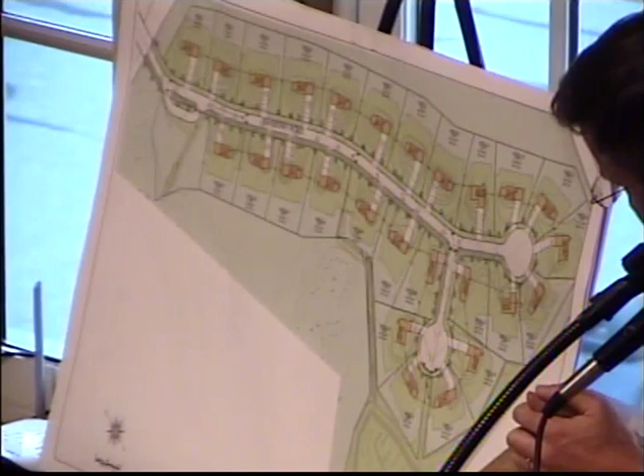The one thing I did mention, and I think I put it in an email, because at the last meeting I was at a wedding in New York, so I sent an email to the board members just saying my thoughts on going forward.

Minimum 20-foot spacing from property lines, and also top grade no more than 60 inches higher than the road. Now this isn't anything spelled out, that's etched in concrete.

I think the further distance from the property line is gonna be more beneficial. We were talking at the meeting I was at that maybe we do it where the water table is, and like I mentioned in my email, Bob regulates 2 feet above the water table. But I'm just not sure that going by the water table would be the right thing.

So I'm looking for some assistance on this. I don't want to put something in the regs that isn't going to work, because we're in the process of redoing our regs. I think we've done that in the past, so hopefully we don't do it again in the future.

So is 60 inches the grading around these houses? What do you have? I see you have grade lines, but I don't see any numbers. Yeah, there's a few numbers on there, a couple. Each line is 1 foot in elevation.

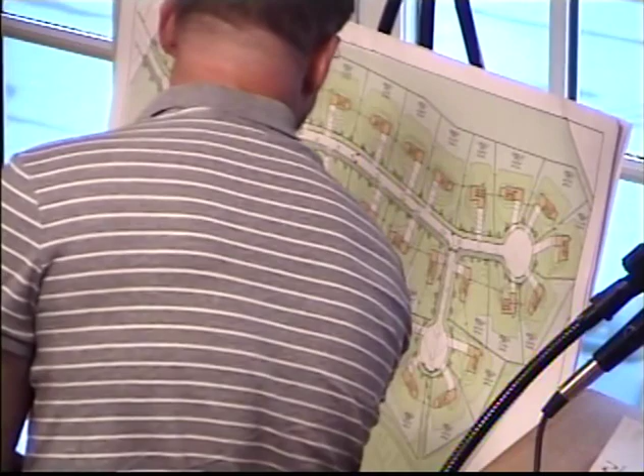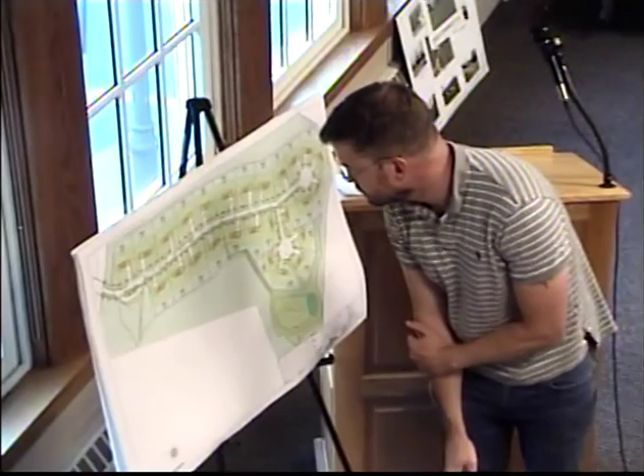Because the top of foundation is, say, 105. So that's a 7-foot difference from top of foundation to the road. And I'm sure you're going to have a couple feet of foundation showing, so it's 5 feet of grading. So 7 feet above the road, but it looks like your existing grade is at 98, so I'm not sure how that one falls into what you were just explaining about being on a hill.

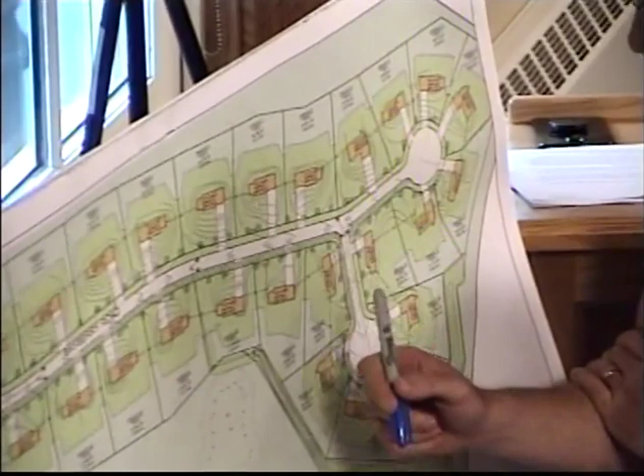Did you see parcel 7? Thinking the label might be incorrect, but the grading shows the garage at about 102. And then the top of the foundation would be 3 feet higher than that, so about 105. Yep, okay. So that's quite a ways up.

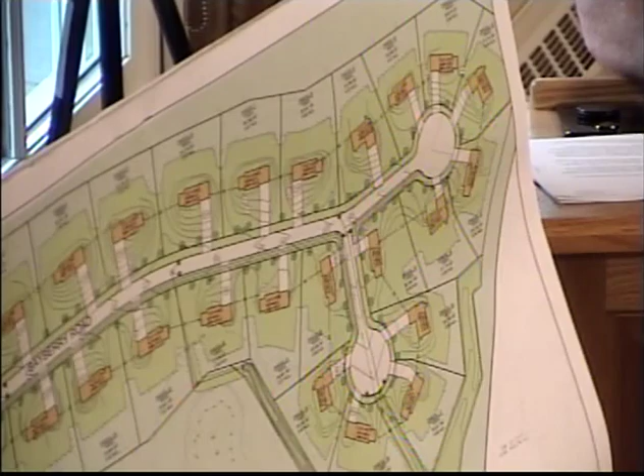I'll show this thing, most of them. So again, that's my concern. Am I seeing that? Is that 98? At least that's what it's showing. I don't know if it's... I was gonna point out the same thing, parcel 7 and 6 seem to be that mounding that we were trying to avoid.

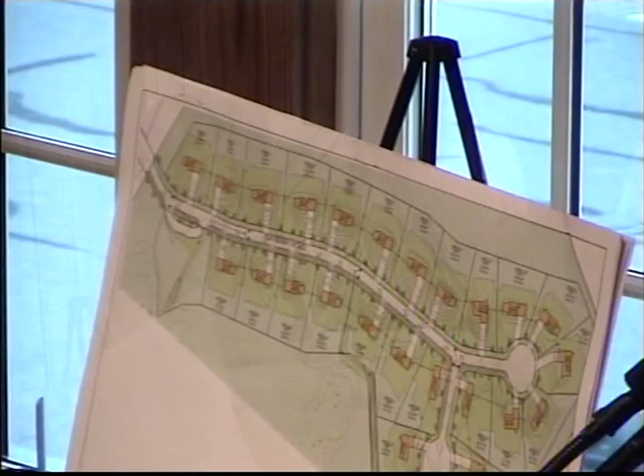Yeah, I mean, we're talking about one thing, but the plan is, so I think we have to get kind of specific on the grading of, in the elevations of... Are you satisfied with the distance between the houses? I thought, I'm satisfied with the way that looks, myself personally. The other guys can speak for themselves, but I think the layout looks good.

The detention area, the basin is something that's gonna be, you're gonna work with Steve to get that fine-tuned, so we make sure it's exactly what we want. So still, my issue, my concern is the grading. So I think that's something that needs to be addressed.

Wonder if it's helpful to put estimated groundwater elevations, for a general idea, so we can start to look at it from that point, which I think then makes it go... it makes sense, exactly with what Bob says. Yeah, then we're going from it.

And again, I don't want to tell you that you can't build on a house lot in a subdivision because the groundwater is 2 feet lower, or 2 feet below the grade, and that doesn't fit within what I'm thinking of, 60 inches higher than the road. Because again, 60 inches, I'm saying 5 feet of material coming in, your foundation, you got at least 2 feet of foundation, so you got 7 feet. So that's quite a bit. And I think when we get over that, I think that's when we start getting these big elevation differences between one yard to the next.

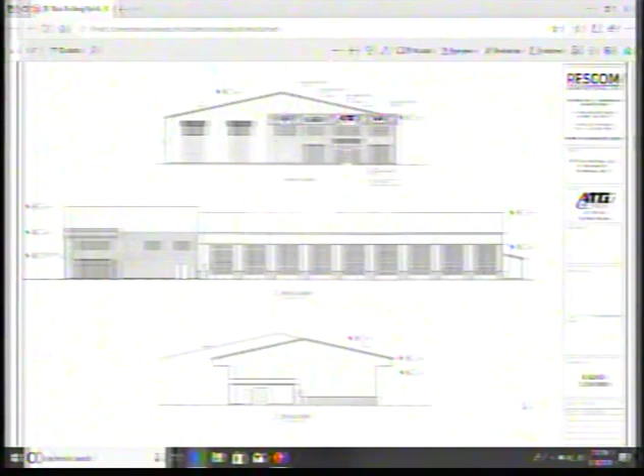There's no storage of trailers on this site. The trailers will not be stored there. Someone comes in with a cab, they're going to have to find alternate storage and just bring their cab to this site for work. So there will be no spare part trucks, used trucks, or junk trucks on the site. They do the work, they use new parts, they don't have any used part vehicles on the site.

So I think the operation fits into the park. In February, I met with the lot owners at their annual meeting and the Board of Trustees. I reviewed these plans with them at that time, and they sent a letter to the board, which should be in the file, saying they had no objection to it. They wanted to weigh in on some landscaping plans, which we said we'd be happy to accommodate. But as far as the use and the proposal, they had no objections. So I think we've addressed the neighbors.

There are many other businesses in there, FedEx and a few others, that have 24/7 truck traffic there, of a much higher volume than we'll have on this site, because our trucks aren't coming in and off the site with cargo. They're not picking up and dropping off. The truck traffic is for maintenance, repair, and warranty work. So unlike some of the other businesses in the park, our volume won't be the same, because we're not bringing goods in and out of the park.

We also propose... The Hill Street and the easement, what's that all about?

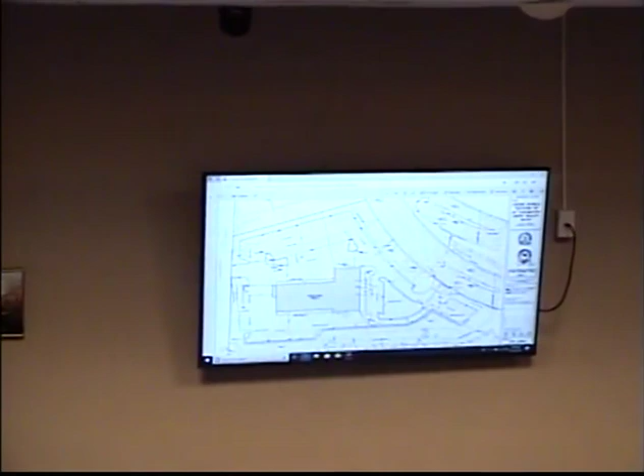What's the Miller Hill Street property used for? My construction company. Okay, so you have the right to drive up and down Hill Street, and you have a deal with the neighbors? Mr. Miller, you'll have to get up and speak to the microphone. Okay, Bob, you do get it.

Probably a couple of years ago, the Millers were working on the highway, taking in grindings. The work was done at night. The truck traffic had to access their site through residential neighborhoods. I fielded a lot of complaints from truck traffic late at night, so I brought it to their attention, and they came up with a solution to cut through the park and make this access way to the back of their property, to eliminate trucks driving through residential neighborhoods and waking people up late at night. So it serves a purpose, solving a problem we had by having this access way.

What's the zoning on Hill Street? Hill Street's residential A. Is there any problem bringing trucks from... well, we're not bringing trucks from Paramount to Hill Street, we're only bringing them from Hill Street to Paramount.

They're in a business zone where they are on Hill Street, so they're cutting across the business part, through Paramount Drive, so they're not accessing any roadway where they'd have to navigate in front of residential. Bert was wondering what their property was zoned for.

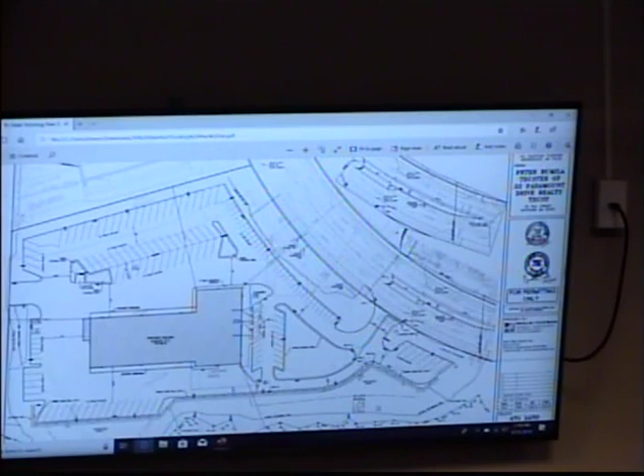How wide is that section from Paramount Drive Road, see that? From the road to the building, it looks... here's a laser, hit the top button, it's a laser. This distance? He's got this distance right here? Is there places for, this looks like, is this grass area? Yeah, I might be able to help you on that. We've had the architect do a rendering initially with the plantings and how they may mature, so I think this is the view from the street that might be of assistance.

Yeah, you guys can look at that one. So this is the grass. Yeah, yeah. So you do show, do you have a landscape plan on there? Maybe, Bob, maybe you can go to the landscape plan if you can find that. Sometimes we get these beautiful renderings, and then when they show up, they say, oh, that was just a picture.

So if that's the picture, it looks beautiful. I'm sure, did you present these pictures to the park owners? They got the whole package, they got the revised package. Oh, these were two different pictures. That was one in July. This is the other one that we didn't see.

All right, well, the pictures look nice, and you have plantings, so there's your planting scheme. You're looking for a waiver for... you look like you have a lot of plantings on the islands. What are you looking for a waiver for? Maybe you can help out with that one?

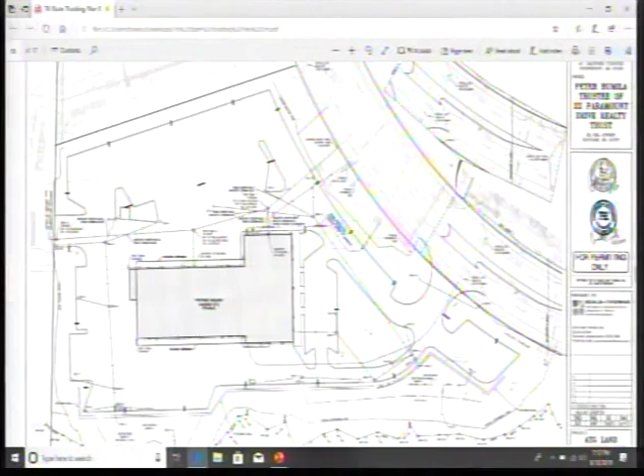You have a line on the first one? Scroll up a little bit. Yeah, we have a map showing the zoning line. Why don't we do it that way? The text is right there at the bottom. It's about 60% of the land area of the building footprint would be in the business district, and about 40% would be in the ED. So if you squared off that rectangle, that's just about the zoning district line, right here. If you went... okay, right there, just like that. It's very, very close to the footprint.

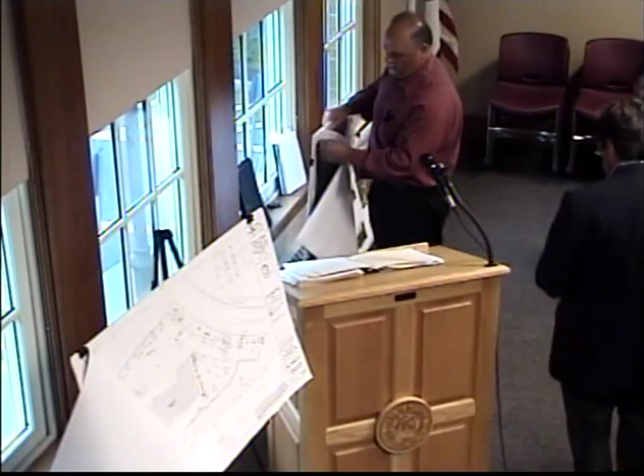And you've talked to Bob that you have to get occupancy permits from, and he's satisfied with what you're doing in each section that meets zoning? Yeah, I've given him a letter addressing all the parts of the bylaw and what's allowed and what isn't allowed, and how we're breaking it up with the footprint of the building. Okay. Yes.

You said some things that you're not going to do? No used trucks? Well, we're not gonna store and have used trucks. We might take a trade-in, it could be there for a couple of days before it goes off somewhere else, but we don't keep 50 used trucks lined up. And no parts vehicles either, and no trailers. All right, so it's not gonna be a surplus yard.

And we do wanna sell new parts. How do we know that this is going to be true? You're going to be out there every morning, Bob, checking on it? I don't think we have to be, because being in the park, they have to make the park happy, I think, before they make the town happy. The people in the park, their board, their committee, really monitors each other.

Well, and you're going to need a license to sell motor vehicles. Correct. We're before Concom now, and as soon as we get this approval, we go to the selectmen next for the vehicle license to sell the trucks. And are you willing to have a restriction that you won't sell any used vehicles?

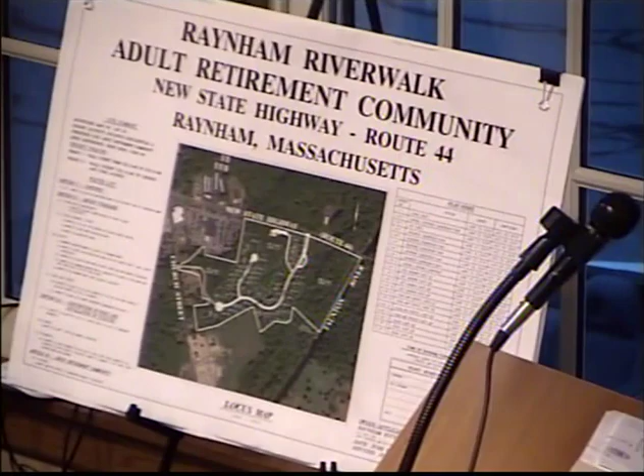Additionally, we received an updated letter from the Town of Raynham Fire Department, the fire chief. He's reviewed the most recent plans and found that the streets and the common driveways within the development provide adequate access for fire, ambulance, and emergency vehicles. I have a copy of that letter for the board as well. What's the date on that? This is July 25th.

And as we stated before, we applied for the variance with the ZBA for the buffer zone along the back of the property. The variance was allowed, it was never appealed. I don't know if the board has a copy of that decision, but I have a copy for them as well.

So at this point, I'll turn it over to Mr. Giosa. He can address any questions you have with anything on the plan. But I think we're at the point where we're ready to hear your opinion on a vote tonight. Okay, well, I want to turn it over to Mr. Churchill. Do you want me to go up to the stand? Yes, please, identify yourself.

My name is Brian Wallace with JC Engineering. As the attorney stated, we released our final review letter stating that we had no further recommendations or comments based on the July 29th plan set. But if there's any questions specific to the board, I'd be happy to answer that.

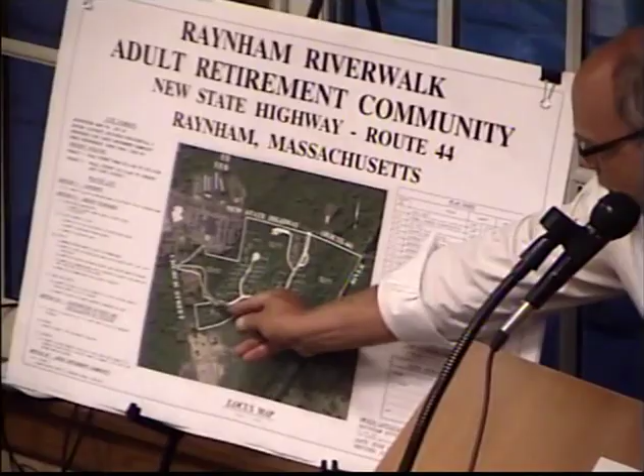Okay, so from the beginning, the original plan had 49 proposed lots, a very similar configuration with one exception. The major change had to do with the primary road of the project, the road that originates... That thing's not engineered very well, is it?

No, I'll tell you what I'm gonna do. I'm gonna take the easel that I left here on Wednesday last week and set that up. It's a little more stable. Here, Russ, check that connection for me.

For the record, we don't know where that came from, so. So if you broke it, you don't... I own it, you don't mind. Understood. There, a little more stability.

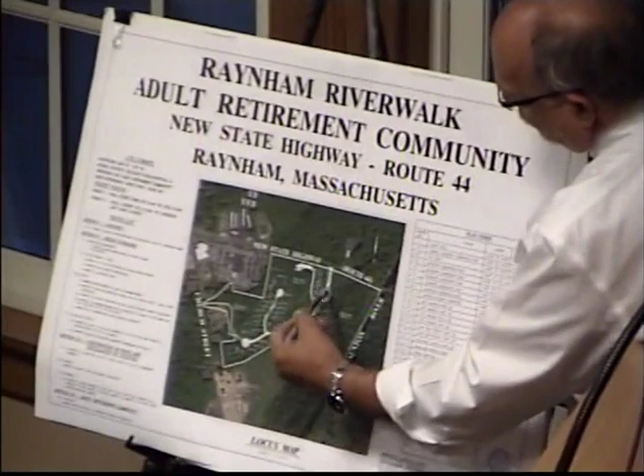So, as I was beginning to explain, the main road coming in from Route 44, we've always had the cul-de-sac here, but we also had a continuation of the roadway out to Church Street, and that was a point of significant debate going back to the very first meeting on the project. After getting input from the board members who expressed significant concerns regarding that point of access...

We came up with a revised plan that eliminated that primary road heading out to Church Street and replaced it with a gravel emergency access way. That eliminated the day-to-day traffic that some residents and board members expressed concern with going back out to Church Street, and basically focused the primary traffic back out onto Route 44. To control that, you have a bigger version of that other than the, what do you call that?

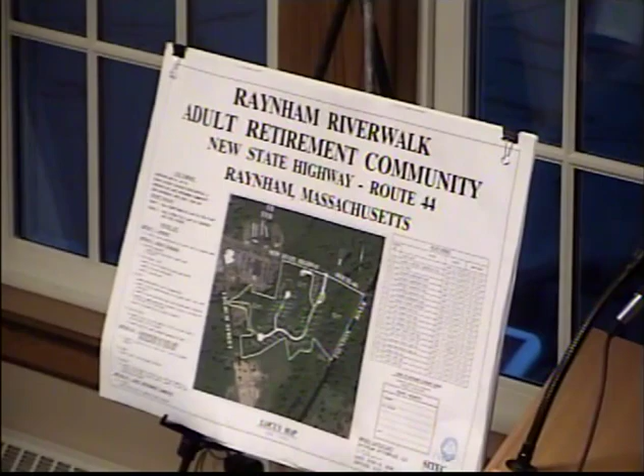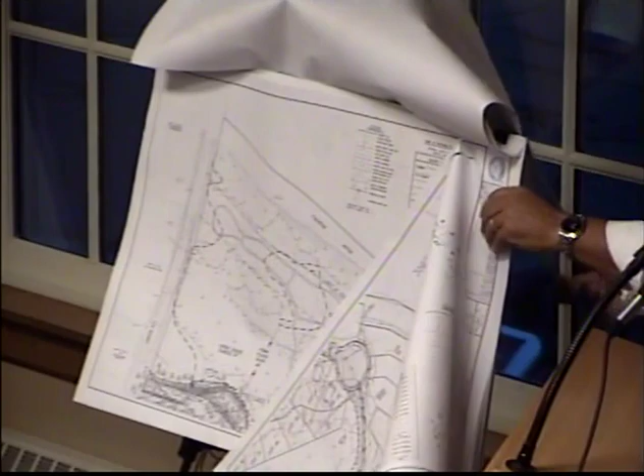Actually, we can go right to that section since we're speaking directly about that area right now. Plans in this set. Okay, so this is that termination point, Church Street, and this is the emergency access we were just referring to.

That has now been designed with breakaway bollards on either end. We've got a paved apron at the Church Street end and an apron at the cul-de-sac side, breakaway bollards and signage depicting that as an emergency access point. That's probably the one significant change that has been made since the original plans came forward.

We're running utility lines through that area, which is allowed activity in those locations. We're bringing the water line in from Church Street, and we are looping some electric service and communication lines also from Church Street.

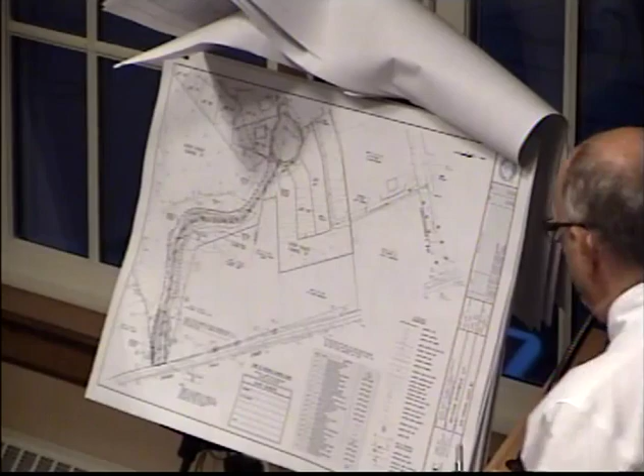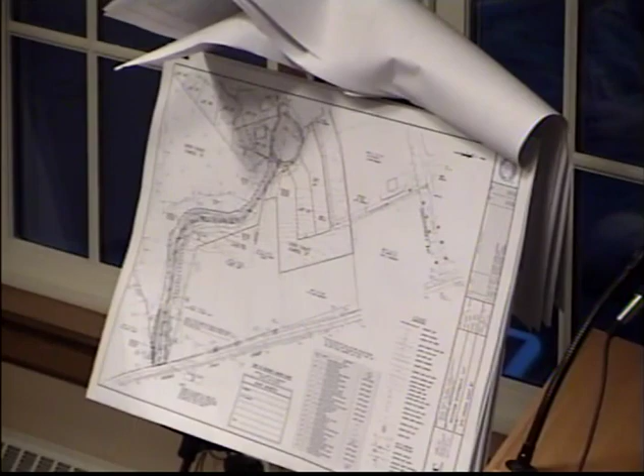The other significant change we made is in the same area. If you recall, on the first couple of versions of the plan, right in that area we had proposed RV and boat storage. It was determined that was not an allowed by-right location for that activity. We went before the zoning board and then withdrew that particular element from our petition with zoning. So we've eliminated that as well from that location. Those are probably the biggest changes overall to the plan.

But if we go back to the very first plan, you'll remember we had much narrower pavement widths. Board members expressed concern about the size of the development and the pavement width, so we opened up the pavement to a wider cross-section. We think that's an improvement to public safety and overall access within the development.

We also changed some of our drainage associated with that, because we originally started with a porous pavement design, as the board may recall. The porous pavement, there were a lot of concerns raised because it really hadn't been proven in this area. There was some reluctance regarding that option for long-term maintenance and stability within the road system, so we did back away from the porous pavement and went to a more conventional approach.

We did a number of Stormceptor water quality treatment units now, and we think that addresses that primary concern at this time. I think the porous pavement has a place somewhere in the future, but obviously not for this particular project.

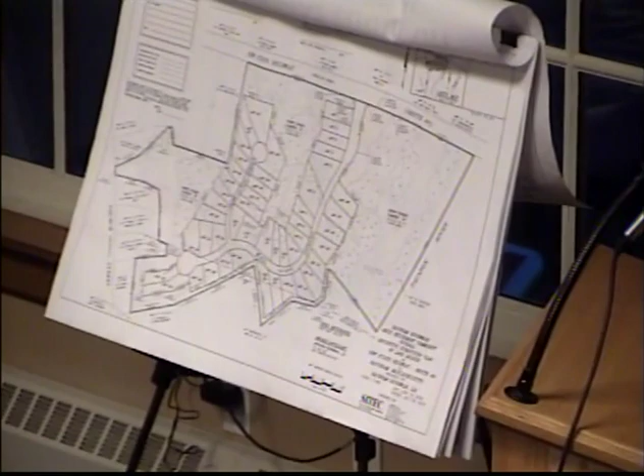So we redesigned our drainage, and that obviously changed our drainage analysis. We had to add some additional flow mitigation as well as water quality mitigation, and also had to demonstrate that we were meeting the recharge requirements in an alternate method. We've been able to do that to the satisfaction of your consultant. In doing that, it added a number of drainage easements to the plan that didn't exist on the earlier versions, and those have been added. Those were some of the final comments that came in from the consultant on the plan.

So those are probably the major shifts in the design from day one to now. We have also reduced the number of lots. Again, we started out with 49. When you look at the plan, you'll see the lots are numbered up to 48.

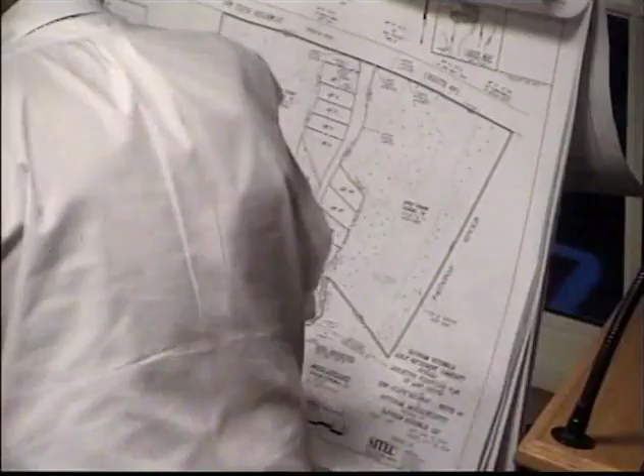So that's one off the plan, but also because the zoning change didn't occur last year or earlier this year, and we didn't get zoning relief to allow residential use in this area, those 4 lots, although they're depicted on the plan, are designated on the recordable drawings as not being buildable lots. So the net result is we started with 49 lots, we're down to 48 depicted on the plan, but out of the 48, only 44 are buildable lots.

So it's a net reduction since day one of 5 lots within the project, and those lots are now shown on the grading plans as just being open space, in terms of we're not clearing trees on those lots. They're just going to be created on paper but not designated as a buildable lot. We would not be able to obtain building permits for those lots because they would not comply with the zoning to build a structure on those properties. So they are specifically noted as non-buildable lots on the recordable plans. And I guess that's probably the last of the major changes that have occurred.

Okay, and Mr. Gallagher has worked with you on this. From the last time you saw a plan to now, you say there's some minor changes? What are the last few changes you made?

The last few changes, and we've outlined these in a July 29th letter, the July 29th revisions: we added drainage easements to lots 1, 5, and 20. That was the result of some changes we made to the drainage design, and it was basically an oversight in not creating designated easements on those lots, so we've added that to the plan set.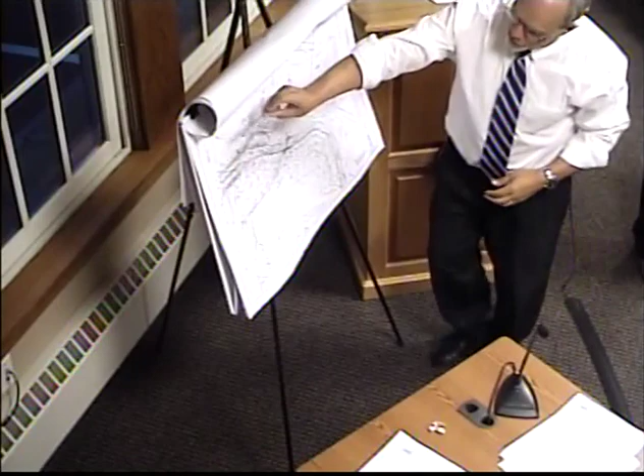Okay, give me a point of reference. Church Street is on the left? Nope, Route 44 is on the left, okay. This is the main entrance coming in. This is the community building down in this area, near Route 44. These spaces right here are designated for boat and RV storage in this area.

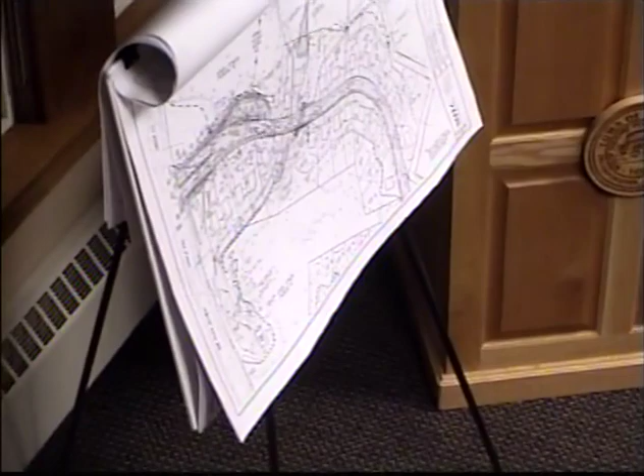And we're providing for it, the regulations don't have a set number. What'll end up happening is as units are sold within this development, those spaces will be issued on a first-come, first-served basis. When they're sold, that'll be the last available one, and future residents will not have RVs or boat storage within the development. So because we're controlling the sales, there'll be a mechanism to make sure that's adequate, and we'll make sure the project stays in compliance with the regulations of not storing on the individual lots.

Okay, I have two other things that keep nagging at me in terms of the overall plan. One is in relationship to the zoning bylaws, the definition 18.3, a self-contained alternative residential community. I don't see it as self-contained in that these lots, buildable or not buildable, you don't have to repeat that for me because I understand that fully. These lots and this cul-de-sac, unless I've got a plan that doesn't have it, are outside of that business-zoned area. They're in a residential-zoned area, which says the project is not self-contained. It's outside of that. That's number one.

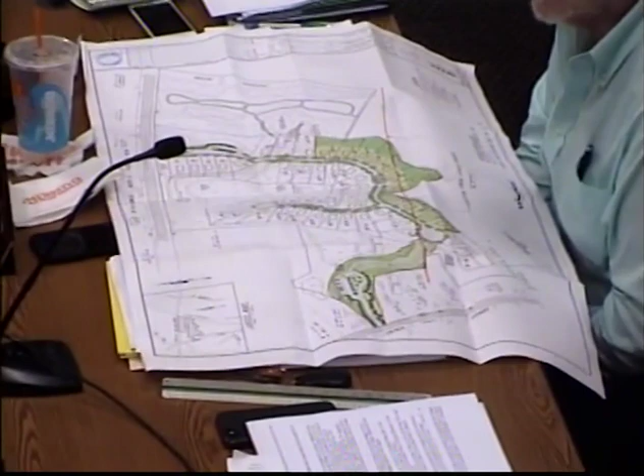I'll give you both of them, and then you can address them as you like. The second one is this common driveway that you've come up with, up at the entrance to 44, to get around the business of the 200 feet, because you're not 200 feet from the opening with lot number one. If I'm reading this correctly, that common driveway that goes across lots 1, 2, 3, and 4, and 5's property, is a common driveway to the whole area, not just those lots. Because if I want to get to the community building, I got to go across that common driveway.

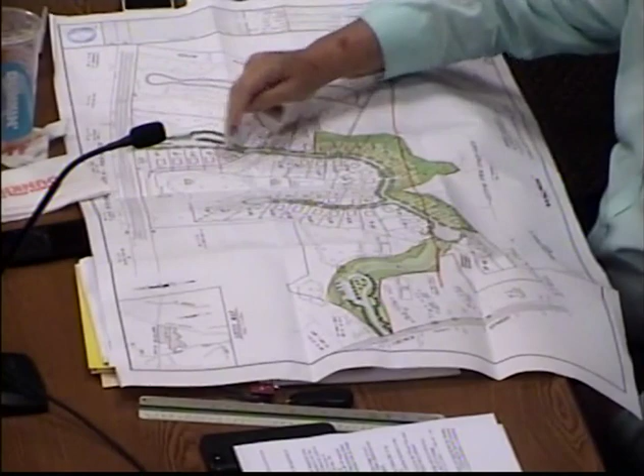And when I look at that, I don't see it as a common driveway. If everybody has to use it, then it becomes a roadway, not a common driveway. That's how I look at this. I'm not an engineer, okay? Many times you hear Danny say, I'm not a scientist. I'm not an engineer, but when I look at that, I wouldn't let a community of 45 residents go across my driveway to get to a building on the other side of the property. That just doesn't seem like it's a common driveway. That seems like it's a roadway and should meet the requirements of a roadway, and it does not satisfy the requirements of entrance to these lots from the main road. Those are my two concerns.

If I could expand on this common driveway. I kept mentioning throughout the process that when the common driveway was first done for the ARC, it was a T-type driveway with Berry Hill, and that was what was presented. So I went back and pulled the old Berry Hill plans, and I'm just going to put them up there as evidence to what I saw, and this is what I consider a common driveway.

I agree with John. In fact, when these driveways, this lot 5, all this over here is its lot area. So the lot area on these lots is on the other side of the street. And they're complying with their lot area by using not only the roadway as lot area, but across the driveway, but across the street.

So when this was done, Bob Iafredi in his letter to the zone basically said this should be built to the same specs as every roadway, and it should have a road name. So it's gonna look like a duck, but not quite like one, I guess. So it's just a far stretch to a common driveway, in my opinion. It's more of a roadway, and it allows everyone in the whole development to go through that.

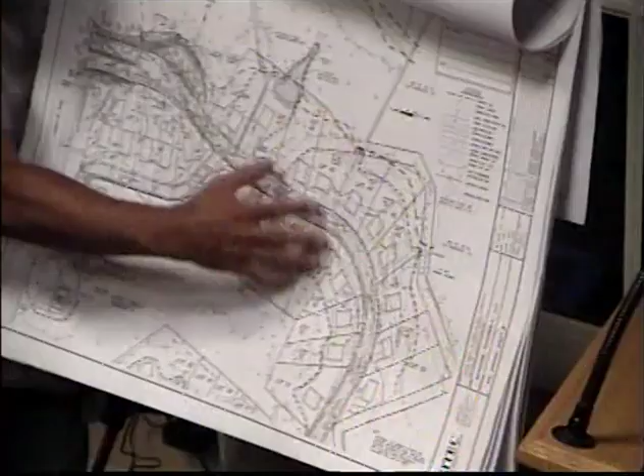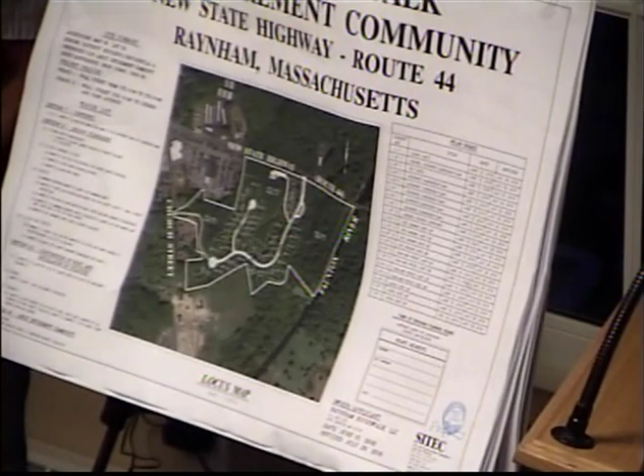So you can have everyone going through your yard, and that wasn't the intent when we first wrote the bylaw. The only ones still here were myself and Burke when the bylaw was written. This, Berry Hill, was the only other ARC to go by.

And it was written to be a template for this and others in the future. So Berry Hill, this was what we were discussing for common driveways to eliminate curb cuts. You had some with single driveways, but a lot we designed as common driveways, and that was what a common driveway was to be. Not something like this that's a road.

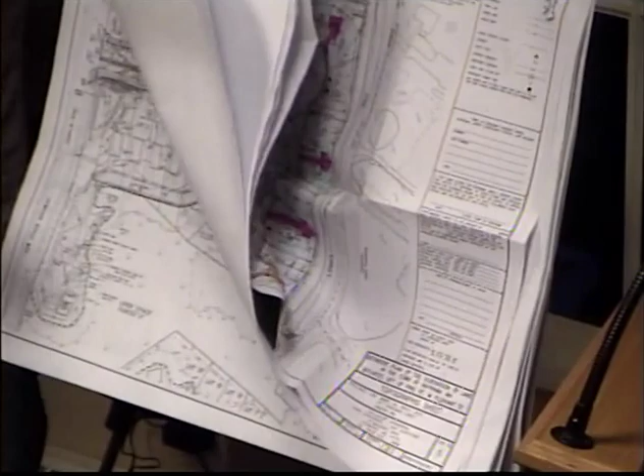It's in effect a roadway that has, not common driveways, but individual driveways. No different than any of these individual driveways with the identical road and identical cross-section. So whether this is a road or isn't a road, they're both built to the exact same spec. They both have the driveways coming off in the exact same fashion. The only difference is you call this an easement. And if that's the case, then you could do that to the whole project and use the roadway as lot area. But this is what the intent was when we did common driveways.

Chris, I have a problem with you saying this is what the intent was. The statute speaks for itself. No, I know, but the statute also says it has to be approved by both the planning board and fire department, so we'd have to take a vote on that, just like we would anything else. Got it on my list.

But that's what we had as common driveways. And as far as the 75-foot strip, that was to residential on this other sheet. The only thing that could penetrate the screening was the main roadway, which is shown, or easements, where we had a water easement and a sewer easement, which is going to come up to, you know, this was the same page of it.

And if you notice, this has all nice 50-foot layouts. It meets all subdivision standards for road construction, which, I don't know, I don't agree with narrow streets with elbows, because basically some of the streets are the width of 2 parking spaces, so you're driving 2 feet from each other. But this was the residential buffer, and this was the common driveways.

And when this was presented, it actually had an 8x11 sheet when we were doing the ARC that Rich McCarthy drew up that had the common driveway just as a T like this. And you can vote how you want, but I don't see that as a common driveway. Okay, and that's my opinion.

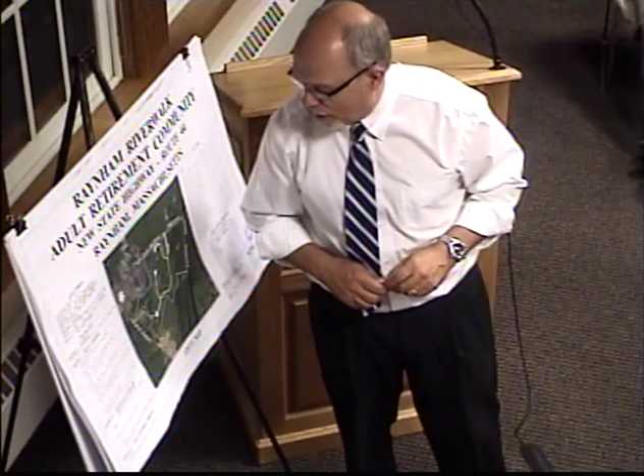What are the waivers you're asking for? They're listed on the cover sheet for the plan set. The first waiver is Section 7 of the zoning, 7.4.2F, waiver to allow the main road to be different from the subdivision name. This is the subdivision waiver, I believe, so it's just a matter of how you name it. Yes, you're not going to name it Riverwalk - no, we have Wall Street as the main road as opposed to Raynham Riverwalk.

I don't have a problem with that. As long as the police department's okay with it, I'm okay with it. Motion to grant that waiver. John, yes? Chris, did you get a second? Who seconded that? All right, I made the motion, seconded. Say you seconded it.

John? That was a yes. Chris? Yes. Burke, yes. Russ, yes. Next waiver, Section 8 of the subdivision regulations, design standards, 8.1 stormwater management - a waiver to allow a minor increase in runoff volume as calculated.

I make a motion that we approve the waiver. Second. John? I guess I want to ask the engineer what he thinks about that, because I'm not an expert on stormwater management.

Yeah, unfortunately I don't have the numbers exactly - it's all right, just want to know if it's a problem or not. But what we found after reviewing the stormwater and where that increase in volume kind of occurs, it wouldn't impact the properties or lots proposed in the subdivision. The ultimate discharge points go off-site to the Taunton River, so we didn't feel it would impact abutting properties already established in the town or nearby area. That was kind of the basis of our opinion on that. Okay, thank you. Yep.

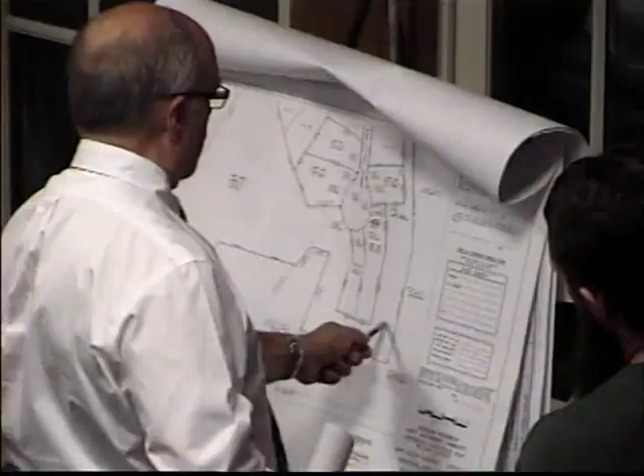You asked about the easement - the easement's on Lot 34, then it comes across, down, and over here. So there's a piece coming across Lot 34 that comes down the majority of the length of the lot. So that would obviously require clearing to put the underground utilities in from that side. But other than that easement across 34, there's still supposed to be no clearing right now on the lots that are in the Res A. Am I understanding that right?

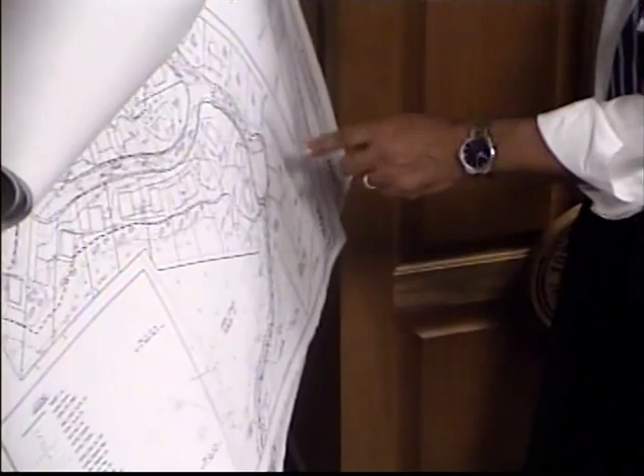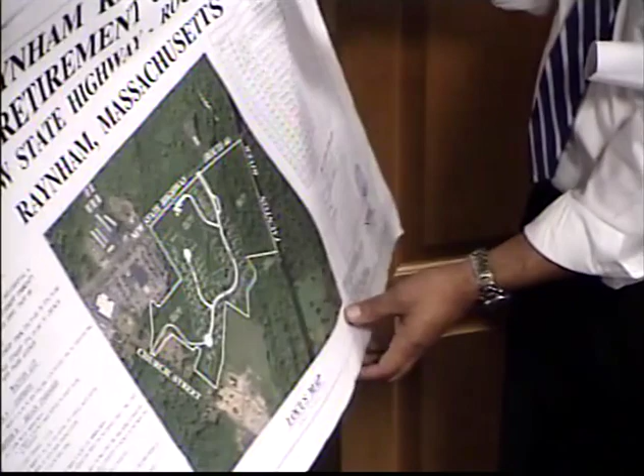I have a question, though, unrelated to your question. You keep talking about 33 through 36. Now, I've got this plan here - this is the plan you submitted to the zoning board of appeals. And that residential line goes through 33, 34, 35, 36, 37, and a piece of 38, and a piece of 39, 40, and 41, and a piece of 42. And you keep talking about only 33 through 36. Do I have the wrong plan? No, you have the right plan.

Well, I see the line going right through the house. No, on this new dated plan, July 29th, we've moved the houses out of the residential zone. So on the plans before you this evening, they are outside the residential zone.

I think the issue I had right from the start was the rezoning. A couple of years ago, I said, before this gets started, you're gonna have to rezone it. And it fell on deaf ears. Then finally, you guys acknowledged that you agreed with me because you went for a rezoning. We voted on it, we all endorsed it, and unfortunately it failed at town meeting. So to me, an ARC is a self-contained, encased use, and you can't have that use overlap into a different district. It's not for or against the project, it's a matter of law to me. That would be the equivalent of letting any business use overlap. And by that logic, we have something coming in front of us at our next meeting, which is a Cumberland Farms.

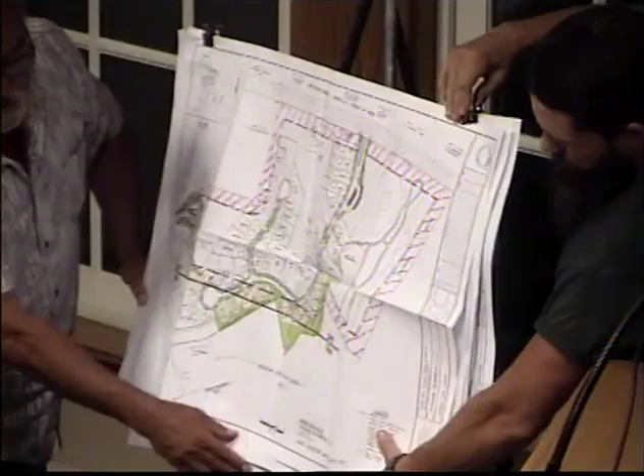If the way I read that - and right or wrong, I'm not saying it's right, I'm just saying that's what the written law is - it shows that an adult retirement community has to be in a business zone. So, in other words, regardless of where lot lines are, it has to be in business zone. If your father's land isn't in business zone, that's just tough.

So here's the business line, business residential. So your ARC can only be from here to 44, which would mean none of this stuff can be in here. Then it says you need a 75-foot buffer along the entire perimeter. The planning board requires that 75-foot buffer to be adjacent to anything zoned residential, which is the residential zone line, or anything with a residential use, which is all these pieces.

It says the planning board can reduce it, but not in any of these residential cases. In the residential case, if you read 18D, it has to be 75 feet in width against residential or residential zone. This is how it should have come in as designed, on the original design - that's why I say get the zoning changed so we don't deal with this and get a potential buffer reduction. But this is what the law says - that's how it starts, and it has to be 75 feet in residential.

In all other cases, the planning board can bring it down. So basically, from this point all the way back to around this point, that has to be 75. The rest of it, we have some flexibility. Well, you say it has to be 75 - didn't they get a variance? They got a variance to reduce it way out here, and it's not even in the zone.

It allows you to put a utility through and allows you to put your primary road, but your primary road can't actually be in the 75 because it has to be more than 75 feet from residential used land to residential zone land. So your primary road can never be here - it would have to be somewhere along this strip. It can't come off, but that's the way I read the law - read D, and that's the way I read it. So, to me, the community has to be from this line up.

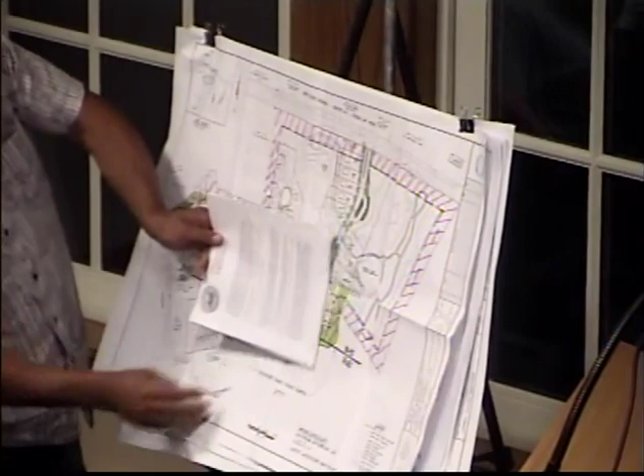Because you can't put a store that overlaps the zone line, a business use, you can't put a car. This is a type of residential use that has to be built in a business area. So the entire community, here's your ARC community, this square has to be up in here. It can't go like this or like that. It's an adult retirement community, it's one entity, and you're overflowing into the other zone.

I pointed out years ago, and if it wasn't for the 138 and all that other stuff going to town meeting, if it went a couple of years ago when I pointed out, it probably just would have been approved and gone through quickly. But the fact is it didn't. And the fact is it says we cannot approve it if it doesn't comply to zoning. We can't, our hands are tied. It's the same as zoning not being able to do a use variance when they've done it anyway, but they don't have the power to. Okay, and that's my thoughts. It's not a for or against thing, it's just that this is what it says.

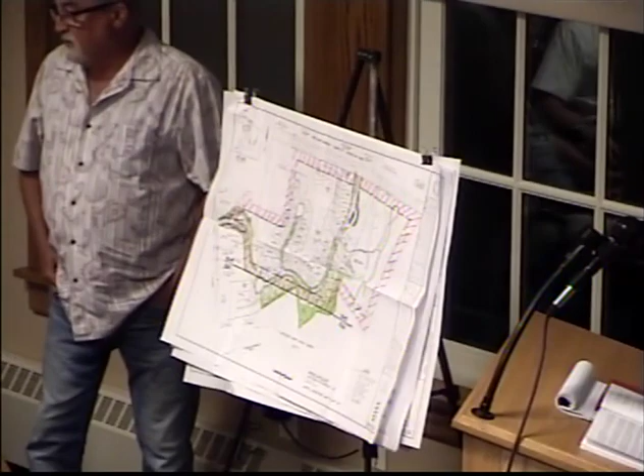Okay, Attorney Prophet, you want to say something? Sure, I just want to jump in here because I want to address this one specific issue while we're at it. I don't want to cut off Mr. Napick, but I obviously disagree with Mr. Gallagher's interpretation of the bylaw.

There's nothing that says the community has to be completely within the industrial business zone. The part he's reading keeps getting misstated. It's the screening shall be 75 feet in width to all abutting properties, not to a residential line, but to all abutting properties that are either zoned residential or currently have residential use. It's not to the residential line that may run through the property, but to the abutting properties. Now, the purpose of this whole screening issue was: I have a house over here in a residential district, I put an ARC over here in the business district. We want to keep some distance between the houses in the ARC and the houses in the residential district.

We will never, ever have that issue. The intent of the bylaw will never be affected because the whole area we're talking about, this existing open space, is subject to a no-building restriction. So the purpose was to keep this house 75 feet from this house over here. There'll never be a house here. It can't, it's a recorded restriction done well before that we provided to you. So the intent of the bylaw is never going to be affected.

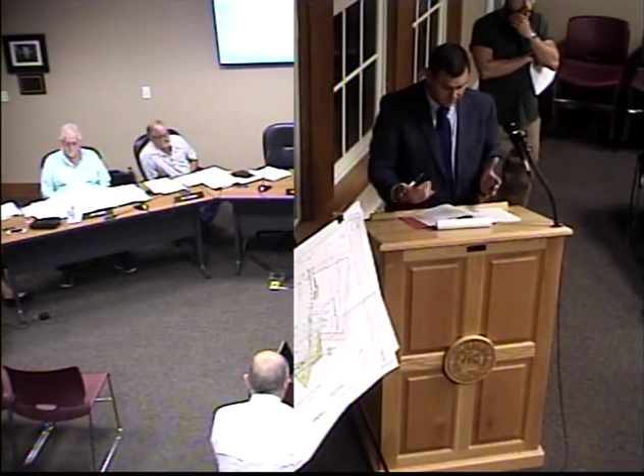The special permit granting authority asks, is this within the bylaw? ZBA, you're the one in charge of the bylaw - you granted the variance, then that becomes part of this bylaw and what I should be taking into consideration. No, I firmly believe I'm correct, not only that, it's my intent, I'm not gonna change my mind.

Okay, this issue is going nowhere. You guys are just going back and forth. You brought this forth two years ago. Sure. You guys agreed, and you went for the zoning change, so you obviously agreed with me.

And then Bob, in his letter to the ZBA, agreed with me. If it passed, that would've been great, but it didn't. You guys all agreed, because we all thought it would just fly right through and didn't think there'd be opposition, but there was. We didn't agree, but we conceded to go in that way.

Okay, going to have you finish up?

Still Drew Napick from Church Street.

I don't know if I got an answer, but is there any clearing allowed on the lots, the stuff that's in Res A, is there any clearing allowed on that right now?

And I'm going to follow up by asking what's defined as clearing, because I know that seems like splitting hairs, but trees, like screening vegetation, I presume that's considered cleared too, once they put in the utilities and then put up the buffer.

I asked about the utilities first because the utility's running down the side of that lot, but I'm asking because lots 33 and 34 are directly behind my neighbor's house, and they want to know.